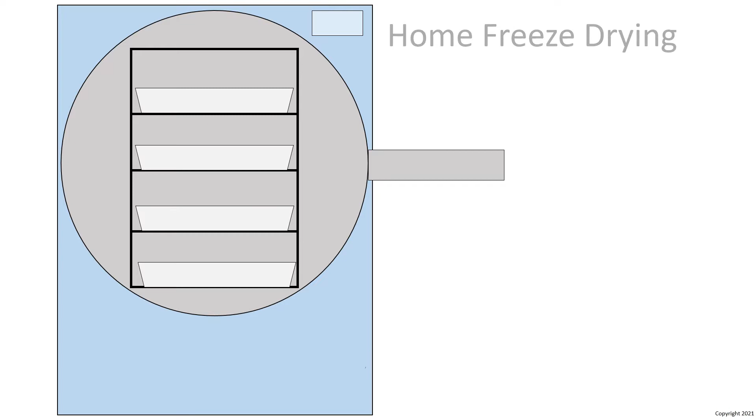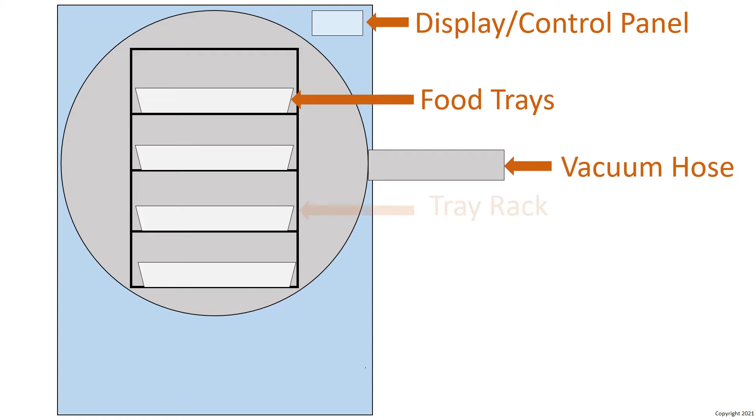The parts of a freeze dryer are the display control panel, the food trays where the food is placed, the vacuum hose that goes to the vacuum pump, the tray rack, the chamber, the housing, and the all-important refrigeration unit deep inside the freeze dryer.

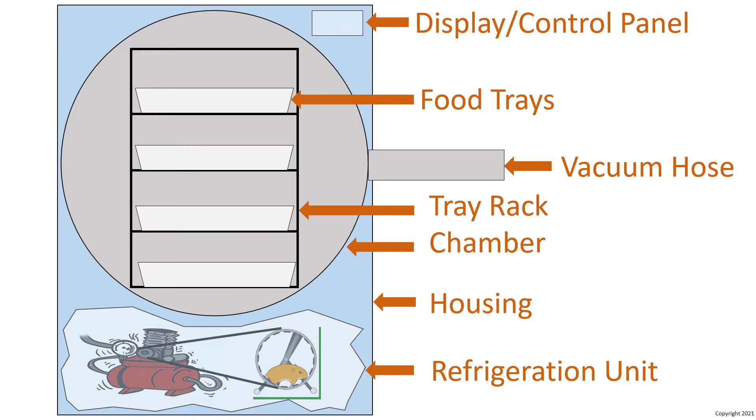How freeze drying works, a quick review. When the freeze dryer is turned on, the chiller unit begins and starts to cool down the chamber. When the temperature inside the chamber reaches 0 degrees, the vacuum pump turns on and starts the vacuum freezing cycle.

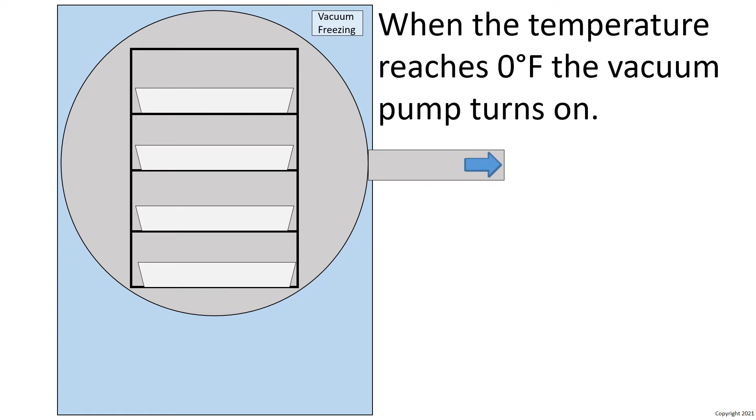During the freezing cycle, the vacuum pump must get down to about 400 to 500 millitorrs. If it doesn't, the cycle may not be sufficient.

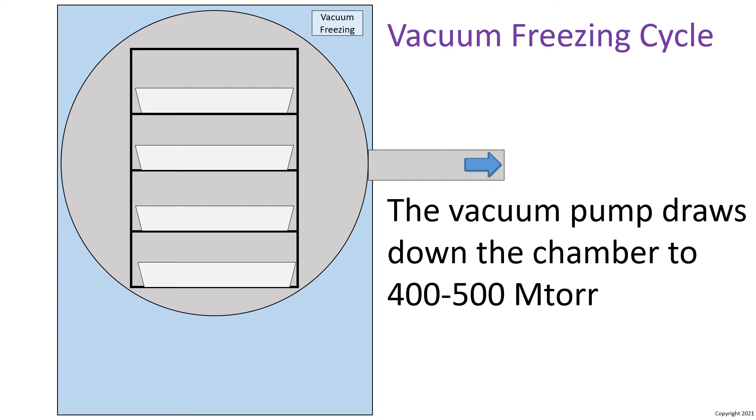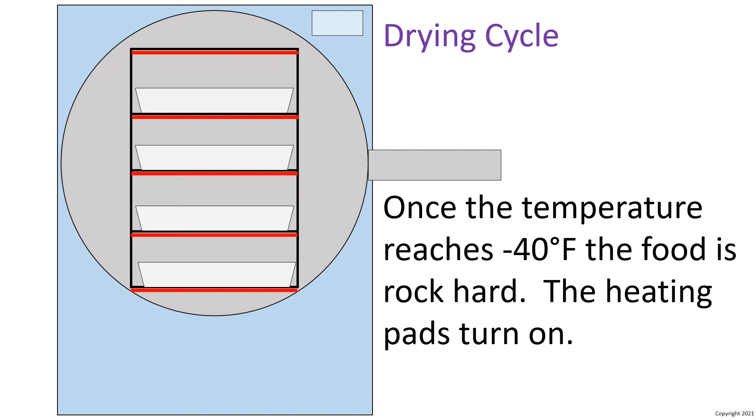Once the temperature reaches minus 40 degrees Fahrenheit, the food becomes rock hard and the heating pads will start turning on to begin the drying cycle.

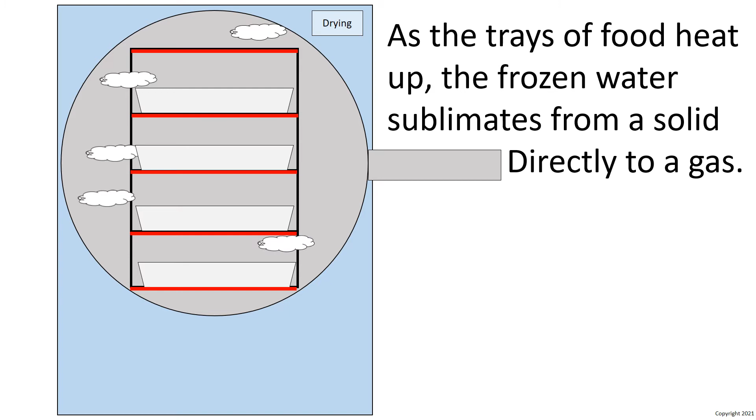As the trays of food heat up, the frozen water within the food starts to sublimate, meaning it goes from a solid directly to a vapor, skipping over the liquid phase.

As it does this, and as the vacuum pump is working, some of the water and some of the food particulates will be sucked into the vacuum pump.

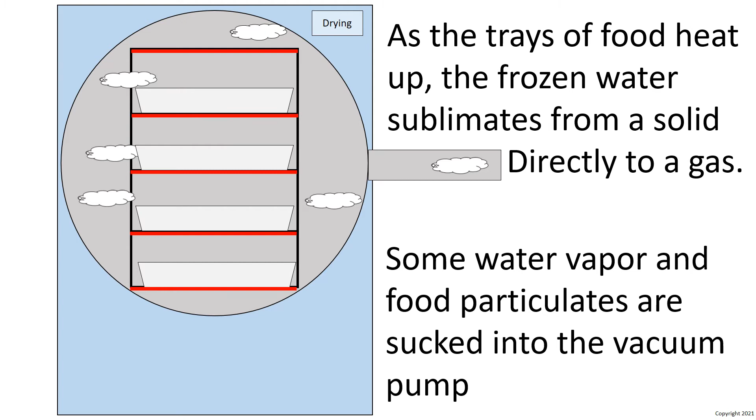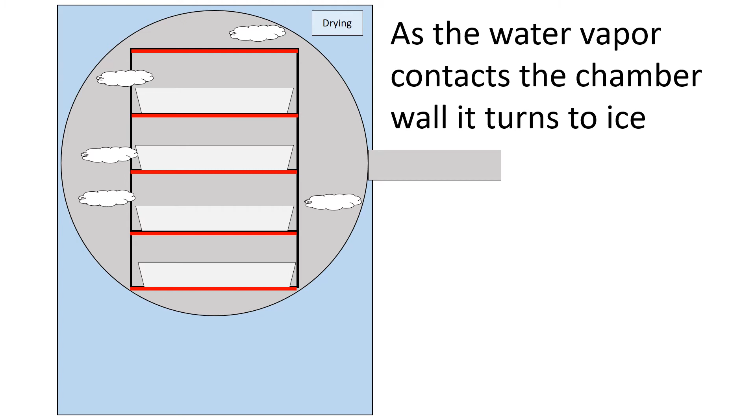As the water vapor inside the chamber contacts the walls of the chamber, because it's extremely cold, it'll turn to ice, and you'll see an ice ring start to grow inside your chamber.

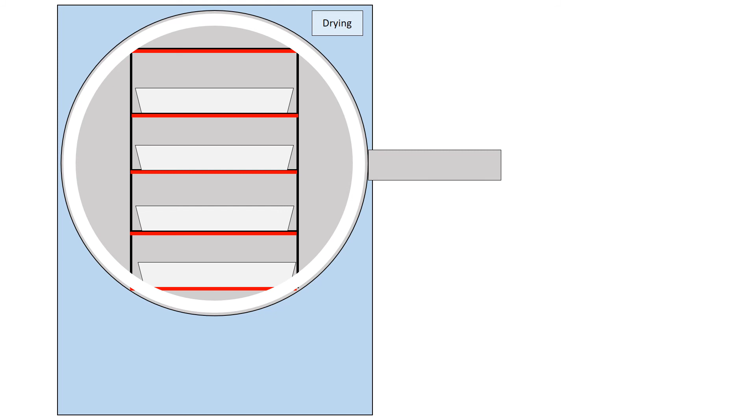As the chamber fills with water vapor, the vacuum will decrease because the air pressure inside the chamber, due to the water vapor, will increase. There's a pressure sensor underneath the third rack in your tray that monitors these pressure changes and adjusts the necessary timing.

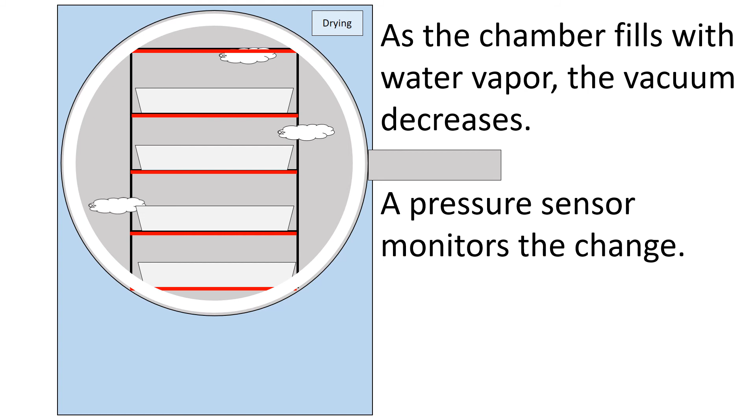At a particular point in time, as the change in pressure decreases within the chamber, the system will enter the timed final dry cycle.

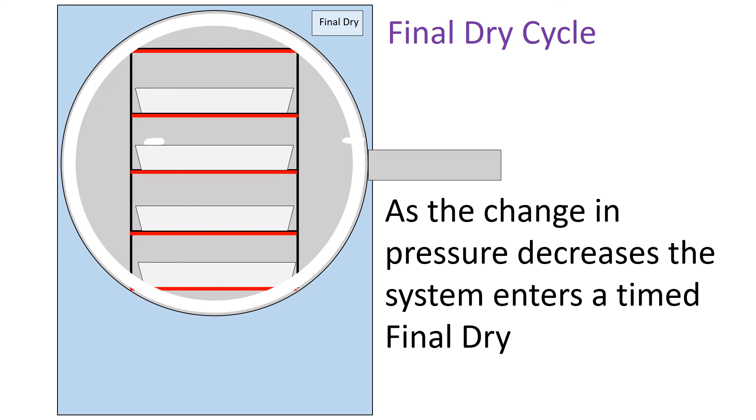At the end of the final dry cycle, it's up to the operator to inspect the dryness of the food and either complete the cycle or add additional time to finish the cycle altogether.